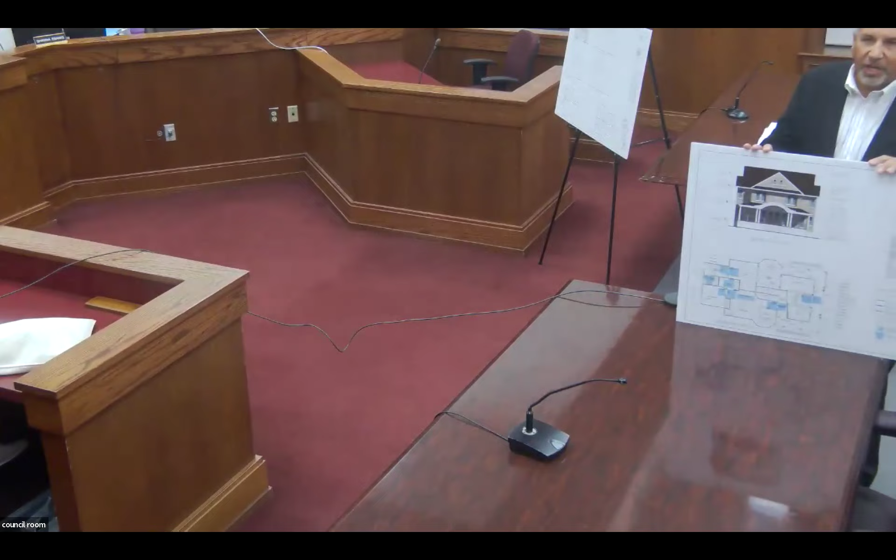We really wanted to keep the residential vernacular together, and keep that design intent absolutely the same. We didn't want to do a stark commercial storefront. Fortunately, where we are right now, we're the only residential looking structure on that strip. But we are sensitive to the fact that this was residential, and we want to keep that vernacular intact, and if you can tell from our rendering, that's exactly what we achieved.

So that's really what we're looking for, and we do want to enhance it a little bit. Karen, did you want to get away from the two entrances like we did, a single entrance, residential if you will, instead of two outside entrances. And we did want to put a nice divider.

I'm trying to understand the front door. Is it two double doors and then there's windows on either side of that? That's exactly what it is. It's two doors in the front, and it will have side lights on either side. That's exactly, yeah, it looks really nice.

And I do think it does keep the character and the charm of the original style that was on Monmouth Street, which was that kind of Victorian Rivertown look with the front porch, and it looks really nice. Appreciate it. So I have just a comment.

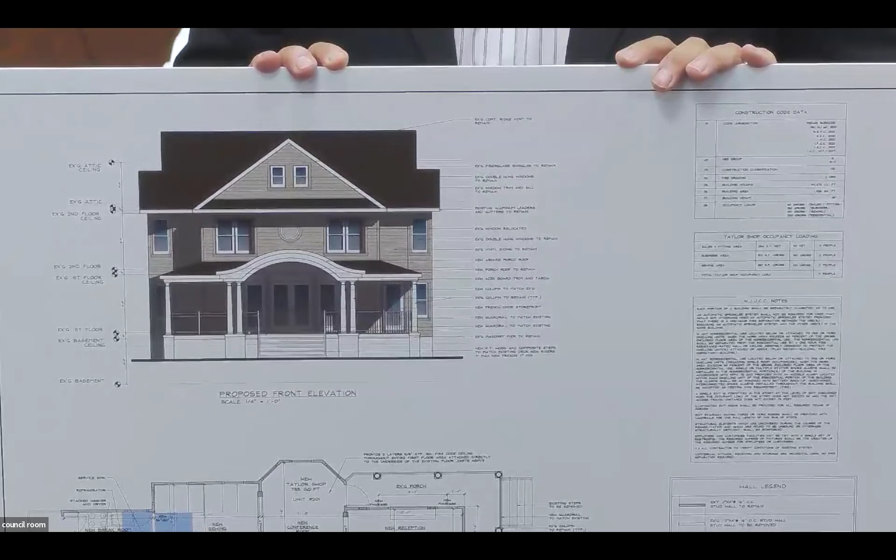What I will tell you is this detail is something we see more in historic homes, though we'll see it in modern too. It's a detail with a lot of historical reference. From what I saw of the paper on the architecture guidelines, that's what your architect is proposing: bring more detailing to areas. Quite honestly, we could just frame it straight the way it is, which would be a lot less difficult and more economical. But we want to bring back that historic character as much as possible with the little amount of work we're actually touching. So that's our intent, and I respect everything you've indicated, but from our standpoint, this is definitely bringing back more historical reference than what we had.

That's okay. Press the button, Karen. Press the button. I'm pressing.

I'm looking online and I found eyebrow roofs. It says it's late 19th, early 20th century, shingle, Queen Anne, Tudor revival, oftentimes dormers. If you drive down 520, I believe, on the right-hand side just as you get out of town, there is a building with that shape of dormer, and there are several in Manasquan as well, from the same time period. So roof versus dormer is the only consideration, but I think you can find some historic reference for this.

Since we're talking about that entrance again, the recommendation I would also make is, if you look at the doors around town, a lot of them have an arch over the door. So something to consider would be an arch over the door, maybe with a transom that mirrors the arch above it to make it more cohesive. Just a suggestion. Commissioner, that's a great suggestion, but unfortunately we don't have the ceiling height.

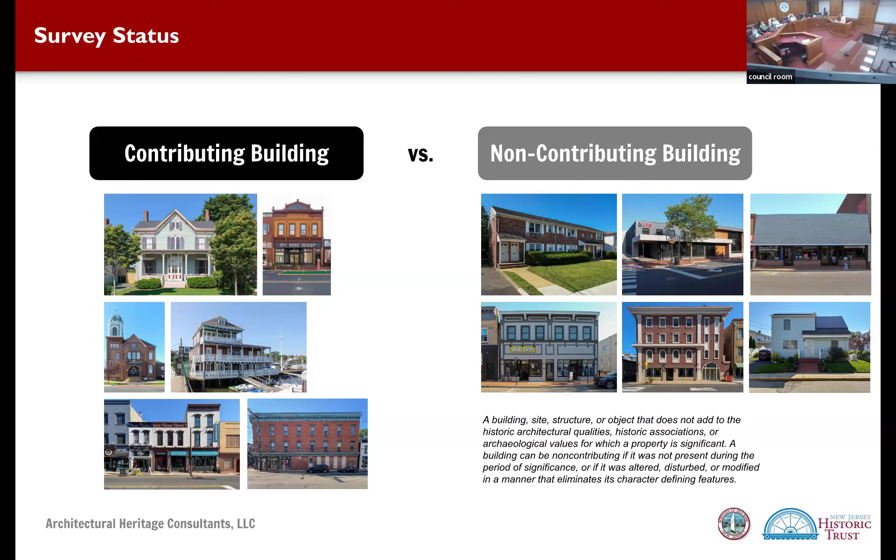The audience for the design guidelines is important to remember as we go into this first draft. There's three different groups. There's the applicant and public that have one set of questions and needs from the design guidelines. There's their architects or other design professionals that are a little more technically minded. And lastly, there's yourselves, the commission and staff, who are meant to administer the design guidelines and decisions in an objective manner in coming years.

Before we get to the draft, I just want to key everyone in on the next steps, just to measure everyone's commentary and understand what comes next. In September, I'm planning on having a final draft done, and I'll be presenting that to you all again ahead of time to look at. Then in October, that'll move forward to the planning board and up the chain to the mayor and council for adoption. The exact sequence will get worked out, but that's roughly how things are looking. And in November is when we're looking to do a public outreach event, which Marjorie has helped schedule already at the library.

We'll be publicizing that to make sure we get a lot of people there. The library is going to put this on their website. It establishes the time period in the meeting room, and it mentions: join us for this November meeting, Q&A and design guidelines for property owners. We'll also do direct outreach to the different real estate brokerages in town and architects, to make sure we get as many of them, if not there in person, certainly watching either live on Zoom, which I'll set up, or the recording.

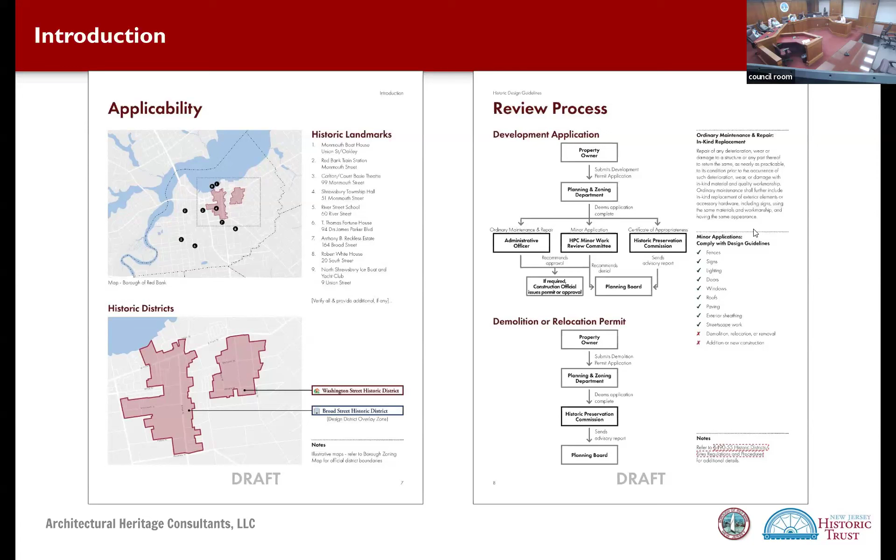The review process has gone through a few rounds with Michelle. She's been very helpful in untangling the way that Red Bank interprets and has set up your HPC, so this may evolve slightly as well. It's on page 8, and you'll see what minor applications are, so people understand that as your ordinance is written, if you comply with the design guidelines you can get your project approved pretty quickly, which is good. Then in the bottom right, there's a hyperlink to your ordinance itself.

Moving on to pages 10 and 11 — the preservation philosophy is just meant to be a quick crash course for people as to why history is important to Red Bank's current success as a town, how the HPC approaches materials, how the HPC acknowledges that many buildings in town have been altered over time, and some alterations are more significant and successful than others, and the importance of authenticity.

Page 11 is an important one that you should really be looking at during every meeting — the Secretary of the Interior standards, specifically for rehabilitation. There are 10 standards for preservation, restoration, and reconstruction, but what you're dealing with most of the time, like even the application you just saw 15 minutes ago, is a rehabilitation project.

I'm not going to spend too much time on the historic context section because that's gotten a lot of attention from the committee. Anything factually incorrect, missing, or overstated in this section, by all means let me know. But the history runs from pages 13 to page 19, and that's meant to be more of an architectural history of Red Bank.

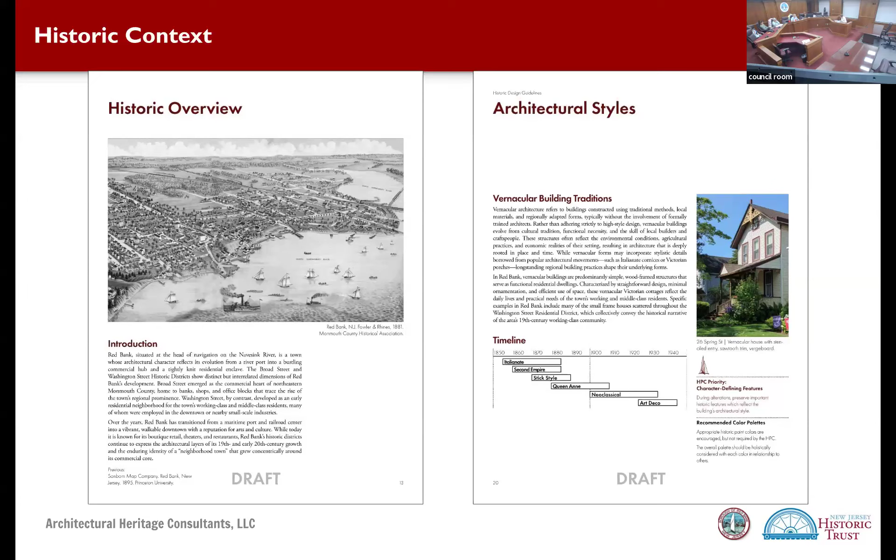And there's examples, one to two examples of each style adjacent to it, and I'll go through and edit the addresses like Marjorie just said.

If it's a gray border, that's a non-contributing building. And when you're reading stuff within the red box, those are the do-not-do's in the historic district. Along the right third of the pages, there are occasionally excerpts from the Secretary of the Interior standards - you'll see the National Park Service plaque for that.

Priorities of the HPC, really important stuff you want people to come to meetings understanding so you're not repeating it every month, are denoted by an icon, like your town logo has.

And then lastly, if you see the hyperlink symbol, those are going to be hyperlinks to hundreds and hundreds of pages of very detailed guidance that the National Park Service has put out over the last 40 or 50 years.

There is on this page, page 25, a discussion related to substitute and composite and imitative materials, which is always a hot topic and even came up during that application just now.

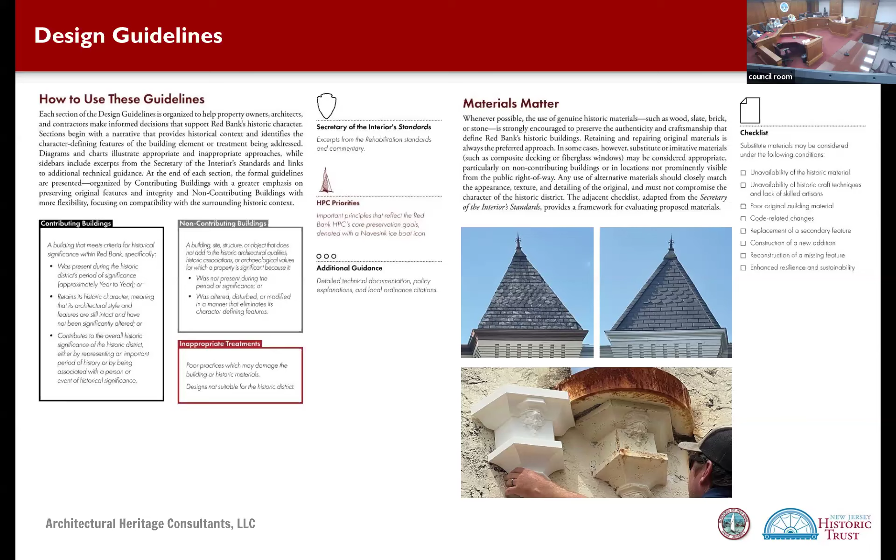Okay, thank you. I'm gonna move on to the roof section.

Just to flag a few things here. You'll see that on the first page of the section, this applies to both your Broad Street Historic District and the Washington Street Historic District. This is an excerpt right out of the Secretary of the Interior narrative related to roofs.

There's a description here about roofs generally, historically in Red Bank, within the two districts. And then on page 27, again, a lot of design guidelines have to do with materials. There's a chart related to replacement of primary roofs on contributing buildings. This is essentially encouraging people that still have slate, wood, or metal roofs to just replace them in kind. It's not appropriate to take a slate roof and replace it with an asphalt shingle roof.

It's unlikely that an entire slate roof would ever have to be replaced. It's typically just the underlayment. You can take the shingles off to deal with that.

And then the fourth row here is probably the vast majority of buildings in Red Bank, which are asphalt or non-historic roofing material. And that's providing flexibility for people to, of course, replace that in kind. You can always take your asphalt shingles off and put new asphalt shingles on. However, if you'd like to look at a wood or a slate roof, which some people may, that should just be based on historical documentation, so that we shouldn't be putting wood or cedar shake roofs on houses that once had standing seam metal roofs, for example.

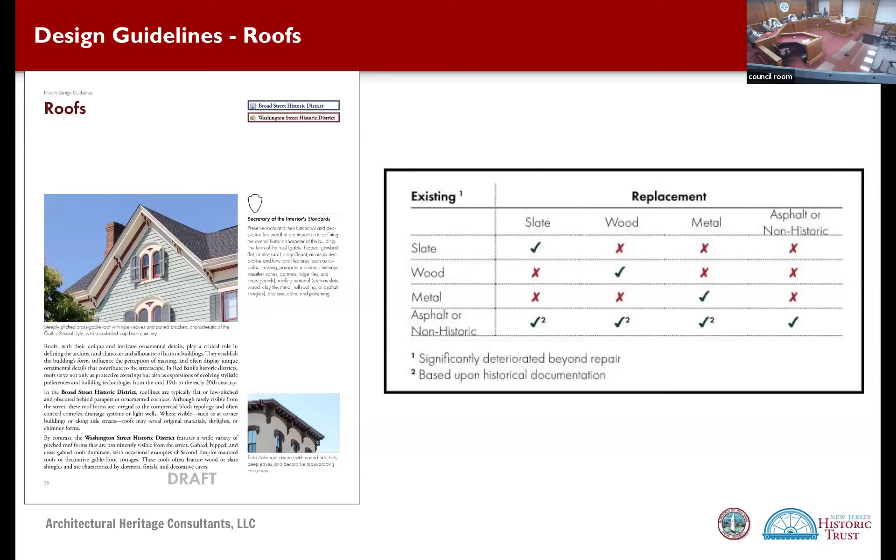Then at the end of the roof section, after you get through cornices, dormers, ornamental features, gutters, chimneys, you come to the design guidelines. They're numbered. There's 9 for contributing buildings, 2 for non-contributing buildings, and then 2 inappropriate treatments listed with also some pictures adjacent to all this. The guidelines generally follow a similar form.

The first one is going to be big picture, preserving that architectural feature. The second guideline deals with what in-kind repair would mean, in this case for a roof, when replacement is necessary, because the HPC should always be looking to, if historic fabric or material exists, to really preserve and maintain that.

Guideline 4 here is about appropriate primary roof material, so that was the chart we just looked at. Guideline 5 is secondary roof materials, which is typically just going to be asphalt shingle. Then there's guidelines on chimneys, gutters, equipment, and skylights.

And then the non-contributing ones, again, are essentially just trying to avoid creating an eyesore when it comes to roofs. Any questions on roofs before I move on?

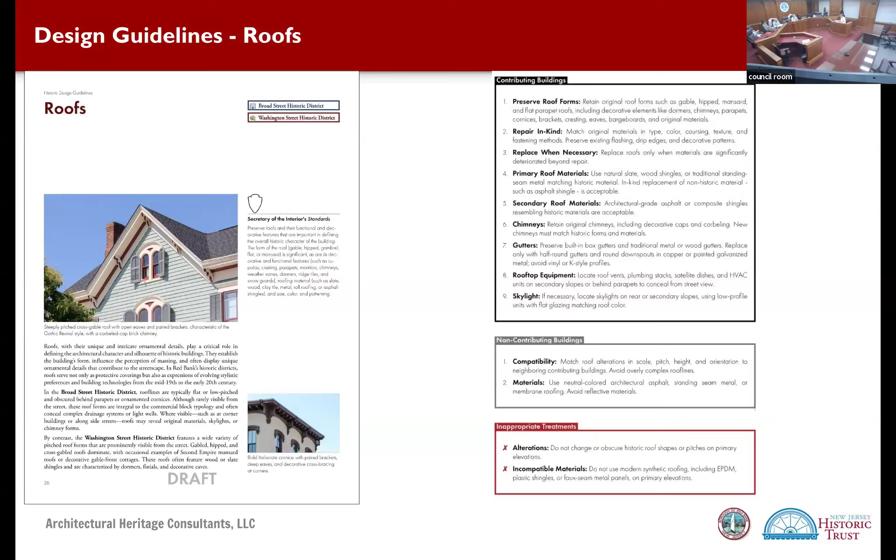Exterior cladding, so we're moving down the building. Also applies to both historic districts. There's guidance on masonry, wood siding, shingles in here. There's a chart again about materials, and this is a common one.

If you have existing vinyl, what's appropriate? That's the type of thing where anything is better than vinyl for so many reasons. That's a great place to look at HardiePlank. That's consistent with the Secretary of the Interior standards for sure.

We left that yellow because we wanted to hear the commission's thoughts on permitting the in-kind replacement of vinyl for vinyl. There are, I think, a minority of towns in New Jersey that I've dealt with that would allow that type of thing to happen. A lot of HPCs have taken this stance that we're getting rid of vinyl. It's not historic. It's not why people designated this district historic. And it just really should not be added in the future.

Thoughts on that? I hate vinyl.

I agree. I mean, we're setting standards here. I think in the standards, we should make clear that vinyl is not appropriate. And obviously, case by case, if there are compelling reasons to make an exception, we could do that. But I don't think we start with a low bar here.

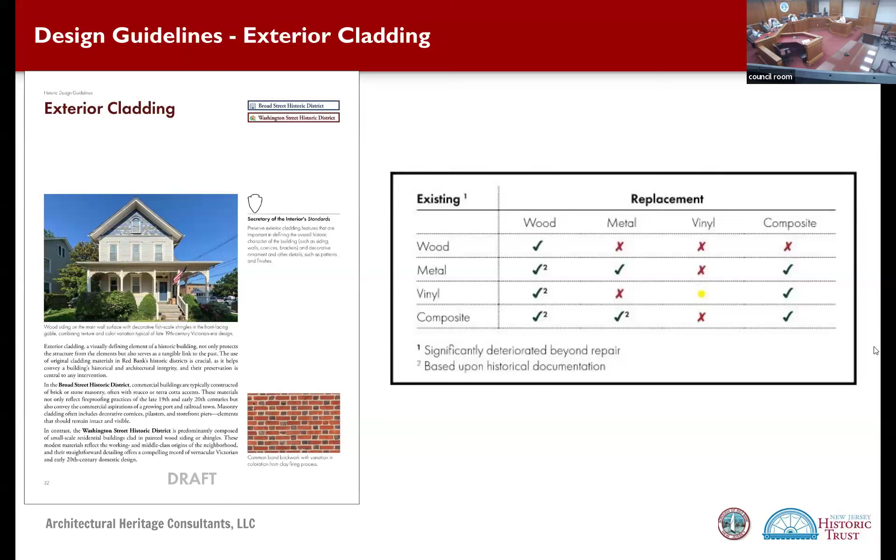The guidelines for exterior cladding, I'm just going to see if there's any I should highlight for you all.

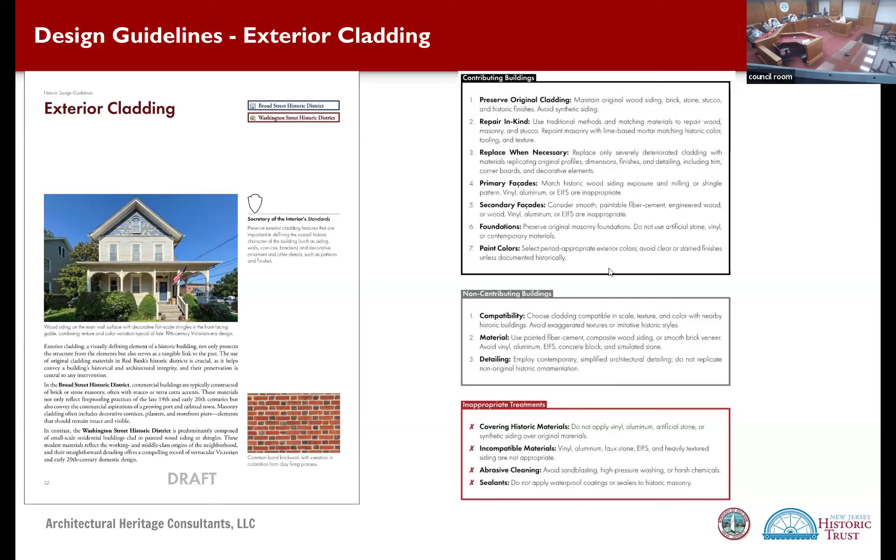EIFS refers to exterior insulation and finish system. It became popular in the late 70s and 80s. It's what stucco and similar wall finishes would be made out of, a cementitious material. It tends to leak, and it's gotten a little better recently, but it's really not a historic material. There's not a tremendous amount of it in Red Bank, there's certainly more vinyl. It's not a historic material, it's like a cheap stucco, and it's not a good replacement for real stucco.

Okay, moving on to windows. We're on page 38 of the guidelines. This applies to both districts again. There are diagrams related to just how to talk about windows, because there are dozens and dozens of terms you can use, and it's important for everybody to understand them.

Different types, 1/1, 3/1, Palladian windows are diagrammed on page 39. There's a diagram on the bottom right of page 39 about simulated versus true divided lights. Most of the time, I think you're going to see people proposing simulated divided lights, not true divided lights. At a minimum, they should be putting something on the exterior of the glass. It should not be muntins between the glass or muntins on the inside of the glass. You want to get some profile and depth on the exterior of the glass. So that's why that diagram is important.

On page 40 is another chart about existing primary window material on a contributing building versus what's appropriate. I think the same conversation and thought probably applies here related to vinyl windows and replacement with either vinyl or essentially financially equivalent composite like a fiberglass or Fibrex. There are so many different names for it. I think it would be great to not add any more vinyl windows to contributing buildings in Red Bank. So that's what this chart will say.

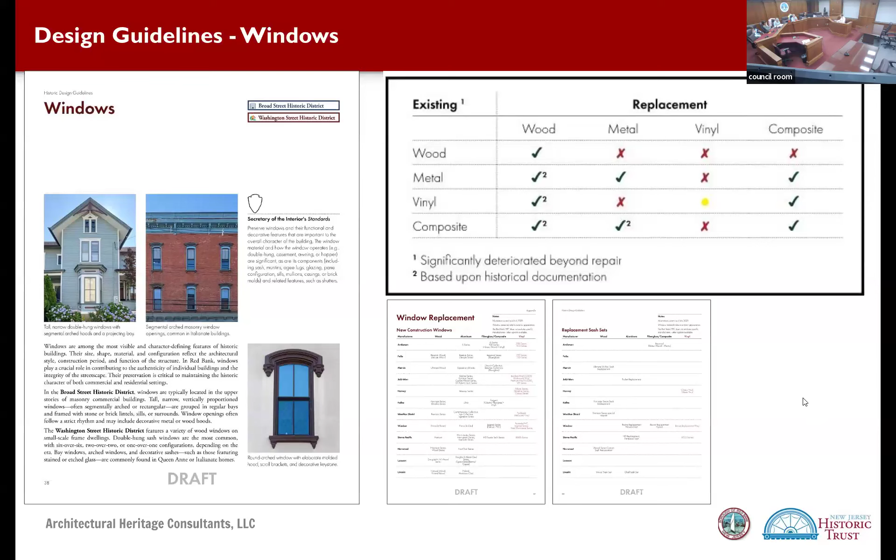But window related question: as you know, there's been a trend in recent years, especially with new construction, for black windows or bronze windows. And we have had people with historic homes or historic structures come in and ask, to the extent they need to replace the existing windows in historic homes, if they can change the color to bronze or black, as long as the new window in all other respects is architecturally, texture-wise, and in number of lights, et cetera, consistent with what the original window was.

What should our view be on that? I have to think about that one, and go back through pictures of the district, because there are quite a few examples of darker windows. It's a color thing. I have to think about that one. I'll have that sorted out by the September draft. It's come up several times.

There's a house we just approved the work on, and after the fact, when they were originally going to repair the windows, they started getting into it and realized they were not repairable cost effectively. So they asked, and said, okay, these are the colors we intend to use, and in that conversation they mentioned bronze. I have to think about that. My initial thought is that it's not appropriate, but we have to come up with a little more substance to describe why that's not appropriate, and why it's hard to see the muntin pattern, because it blends in with the glass and everything else that happens.

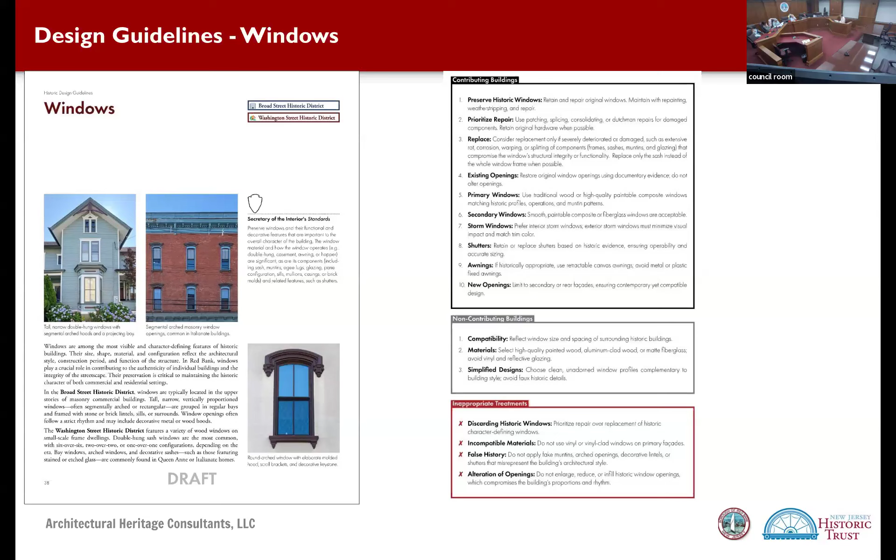Yeah, okay, let me think about that. I'll put that in.

Any other questions on windows, by the way, before I move on, or comments?

I just want to say, on the window guidelines on page 42, I agree with the inappropriate examples. We may get pushback because people don't want to put in central air and take the window units hanging on the front of the buildings, but I think we should still say it's inappropriate. I don't know if anybody cares, but the fact that you could have that hanging on the front of it. I think it gets back to us setting standards here. Obviously everything will be case by case, but we set an appropriate bar. I agree with the examples of inappropriate on the guidelines page for windows.

So porches and entrances is only for the Washington Street Historic District. The diagram of the different components of a porch, those 7 things, are what you should be seeing with every porch application. Railings and lattice work, which I think was even referenced on the application tonight, there's a diagram on page 45 about that.

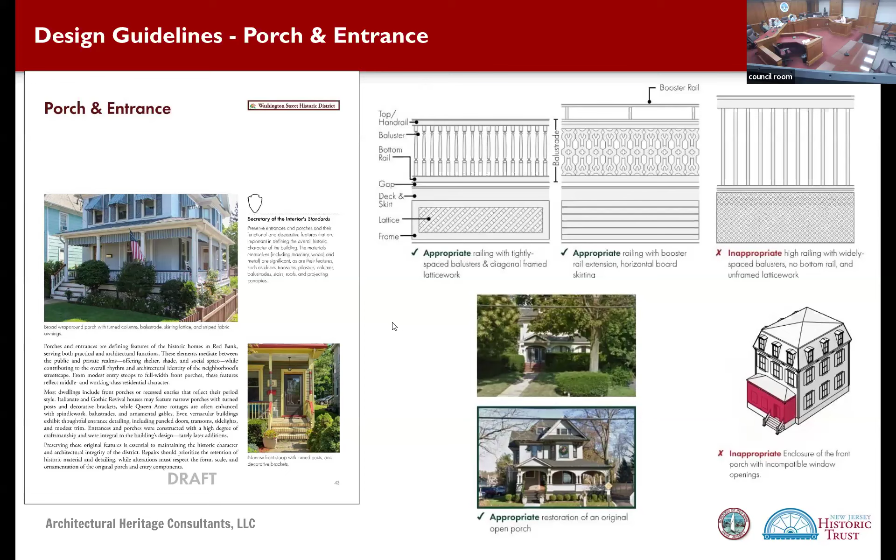And the guidelines for porches we will see on page 47, and I think they're pretty comprehensive. Next, component of porches, doors, again only for the Washington Street Historic District. There are a lot of very well preserved, particularly double doors, throughout the Washington Street Historic District. That's something I think has been done really well here in Red Bank, and that should continue.

Garage doors is tucked into this section as well, that's on page 50. And then on 51 is where you'll see the guidelines for doors. It's essentially about if you have a wood door, especially if it's covered by a porch, it's probably in good enough shape to be repaired, and should be. No one should be going to Lowe's or Home Depot to buy a vinyl or fiberglass door with that funny gold patterning on the glass, like the two bad examples on 51 are. That really degrades the historic district and streetscape.

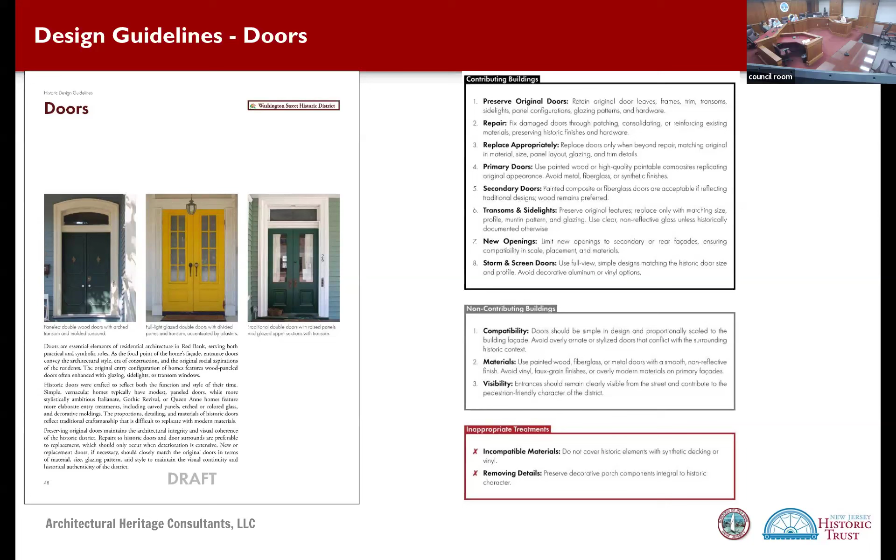Okay, page 52 is storefronts. This is an important one for Broad Street. And I'm going to, at this time, actually pass around these brochures I made to summarize this section, which I'm going to present at the River Center next week.

Thank you, I got one. You got one? Yeah, or Karen left. Oh, she left. You could take it, you could. Unless you want it.

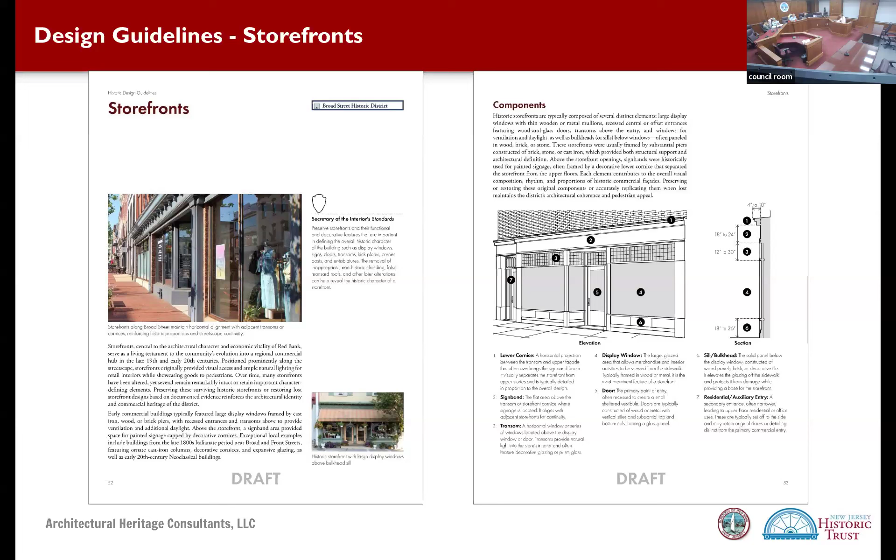Everything in the brochures is already in the design, it's just simplified in the brochure. So the storefront section has a diagram of a prototypical historic storefront and the 7 components of that. Then on page 55 is a flow chart to understand what type of treatment you should be doing for a storefront. This is something that, just from firsthand experience serving on the Hoboken HPC and advising the Montclair HPC, I see a lot of people get tripped up on, commissioners and applicants, even architects, as to what they're doing and what treatment they're supposed to be following.

So this flow chart on 55 is meant to demystify that, and the brochure is all built around this. You'll see if you open the brochure there are 3 different columns: restoration, rehabilitation, and new construction. Restoration and rehabilitation, unfortunately, people use interchangeably. They mean different things, going back to the Secretary of the Interior standards. There's separate and distinct philosophies for both of those.

A restoration project is for a contributing building where there's historic documentation available, and the objective of a restoration project is to return that storefront to how it once existed in an earlier time within the historic district's period of significance. So let's just say 1920 - we're here in 2025, you're returning that storefront to how it existed in 1920. In order to do that, there should be an intact historic storefront and photos of the historic storefront, so you're doing a faithful restoration. This is not an appropriate treatment for newer buildings, stuff built after the historic district's period of significance, and not where you're looking to change the historic look. So the brochure shows a before restoration example with some semblance of architectural fabric remaining, and the lower picture is what a successful restoration would look like after.

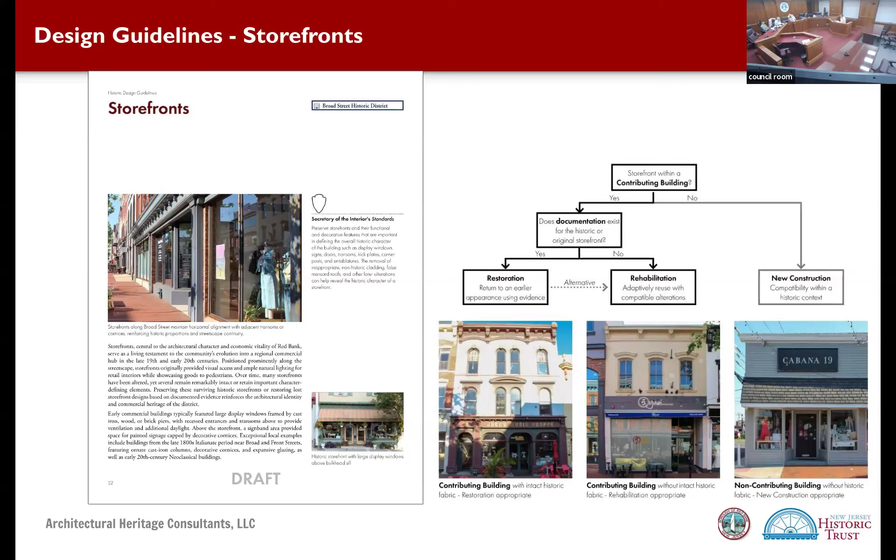Thank you, I have a question about this handout. I see on the bottom that it's New Jersey Historic Trust because it's part of the money that they gave us to do this. I'm guessing that when we have our next meeting of the subcommittee next Friday, you're going to share this with Maren. So this would be something that would be in the River Center, like in a kiosk or something. So we're going to pay for this to be given to the River Center and maybe a way for them to reprint it when they run out?

Yeah, I think it would ideally end up on the HPC's website, just the 2 pages that compose this brochure. Anyone could print it, and I would imagine the River Center would be pretty motivated.

Okay, so to get started with this whole process and introducing the guidelines, as part of your contract, would we get like 100 of these, or how would that work, to get this out there?

Some towns ask for these brochures and build them in. I don't think I have that for Red Bank, and I really made this because I sensed the River Center was maybe not understanding the different lanes a storefront could fall into, and I wanted to make it abundantly clear. I think this would be helpful for them. I like that it repeats the link.

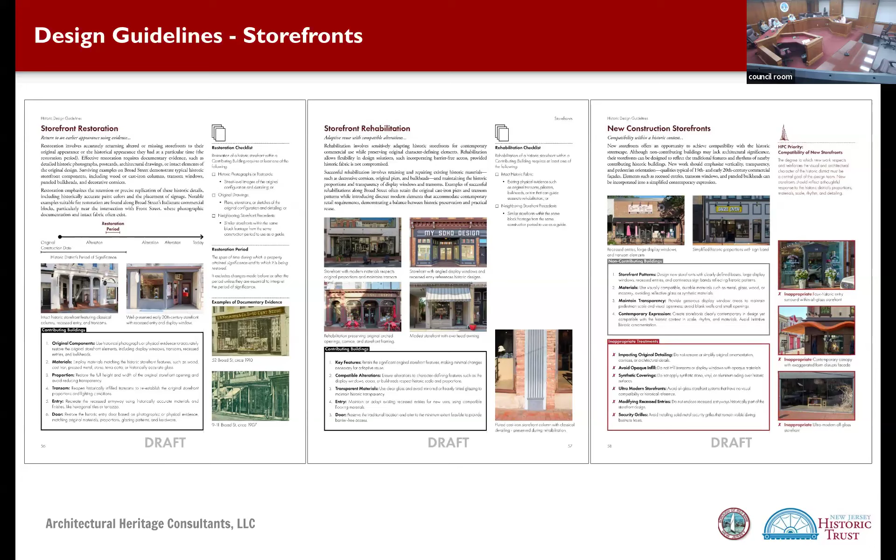Pages 56 to 58, which are spread on the screen, detail the different treatments per storefront. The majority of stuff you'll see is the rehabilitation one, but there are cases where people are restoring or dealing with a very intact historic storefront, and that's a different situation. Then there are other cases where it's not a historic building and people can do something a little different - not as different as the inappropriate examples I have there - but they have a little more leeway, and we're just looking for general references and compatibility in those proposals.

Also, in this section and in the brochure is a section on signage. First is identifying what type of sign we're proposing. There should be some dimension to the letters - it shouldn't just be a sheet of metal or plastic printed directly on, or vinyl wrapped. There should be some solidity to the sign in the historic district on any type of building. Heights are provided there - I'm still cross-checking this to make sure we're not running afoul of your zoning, because we don't want to create more confusion. There's also light temperatures in a diagram - people should most of the time trend toward the warmer end of color temperature versus the super cool blue light that isn't the most pleasant thing to see at night, especially in the historic district.

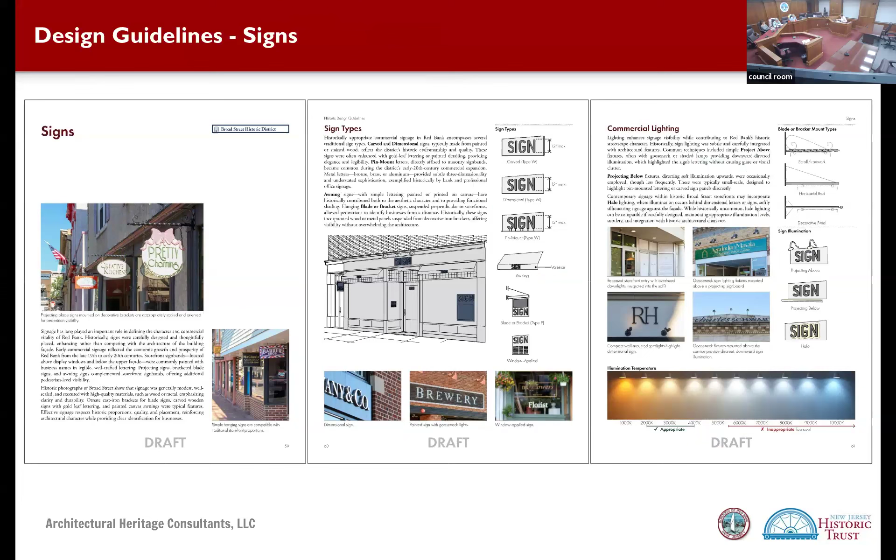Any questions on signs before I move on? By the way, that's a big chunk of Red Bank. Okay.

The following section is all site and streetscape. A lot of these are more in the category of recommendations versus guidelines, because you may not strictly speaking have purview over them. So this is stuff if a homeowner or business owner is curious, like an appropriate walkway between sidewalk and their porch - where to go for that type of stuff.

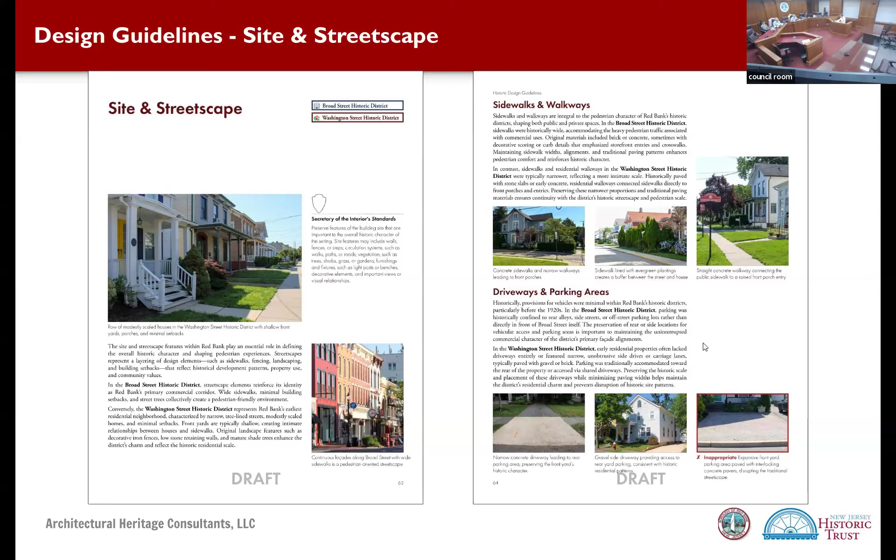Page 67 is the section on accessibility - about opening doors, adding lifts, ramps. There's a lot of storefronts in this town that have steps, so this is the section to look at for dealing with that sensitively.

Mechanical and utility equipment includes solar technology, solar panels, but given local ordinances that's a category of just recommendations and not guidelines. Ideally, they should not be on the front gable of a house facing Washington Street, but that's only a recommendation.

Page 71 is the demolition section. These are just the seven considerations from your ordinance pasted right there.

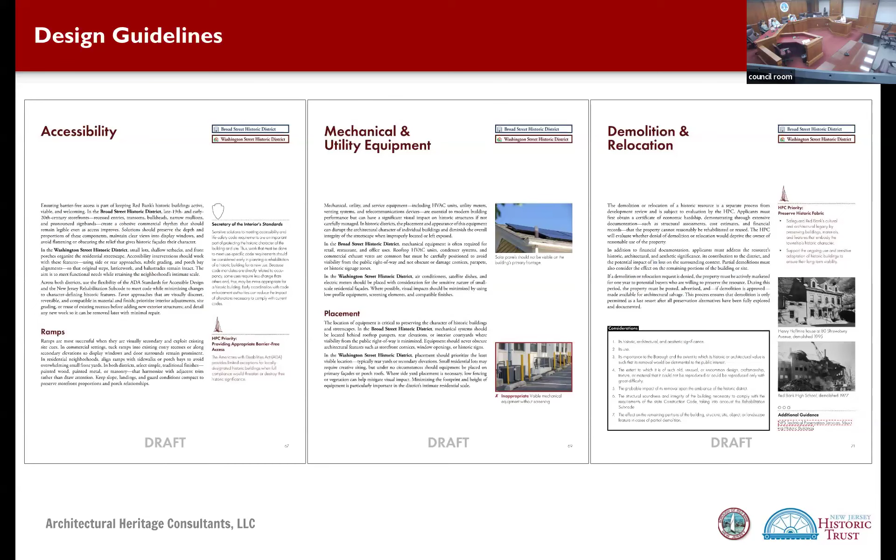And then we are on to the additions section, which starts on page 73. This is for both of the historic districts - you're applying Secretary of the Interior Standards number 9, especially, and also 10. The additions section includes a few pages just priming people on site placement basics - height, massing, proportion, scale, architectural features.

On page 76, you get into actual guidelines for three different broad categories of additions you may see: side and rear yard additions, so lateral expansions of a house; rooftop additions, on page 77; and carriage house and accessory structures on page 78. There are guidelines for each, depending on if it's an addition to a contributing or non-contributing building, along with a diagram of a very appropriate example of that type of addition and a very inappropriate, disruptive example that we would really like to not see in Red Bank.

Any questions on additions? No.

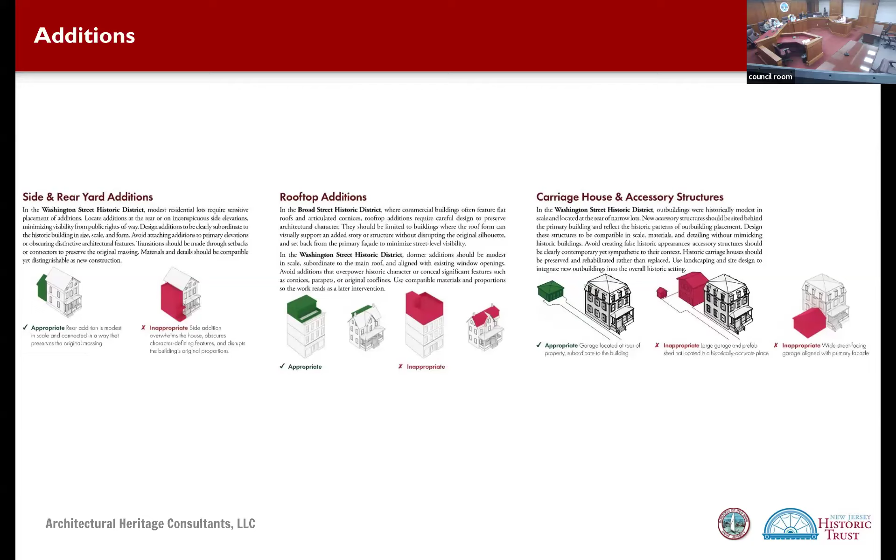The last section here is new construction, so this is for both districts again. And this is divided up into the different criteria that you can use to approach a new construction project.

I will renumber the guidelines here so they run continuously. So the guidelines for site placement start at 1, and when you get to height and massing, that should pick up at 8, not 1 again, so you can always cite what guideline you're looking at. So on page 81 you would start with 8, 9, 10, 11. You'll be able to say, I'm looking at new construction guideline 9, and there's only one example, because right now I have 3 or 4 different number ones, which could get confusing.

Site placement is a factor, height, mass and proportion and scale, architectural features, and lastly materials. The examples given in new construction are purposely only inappropriate examples. I think people should have some flexibility and design thought in new construction, so we didn't include appropriate examples, because we don't want that to become a copy and paste situation in the future. People should think about it and bring support.

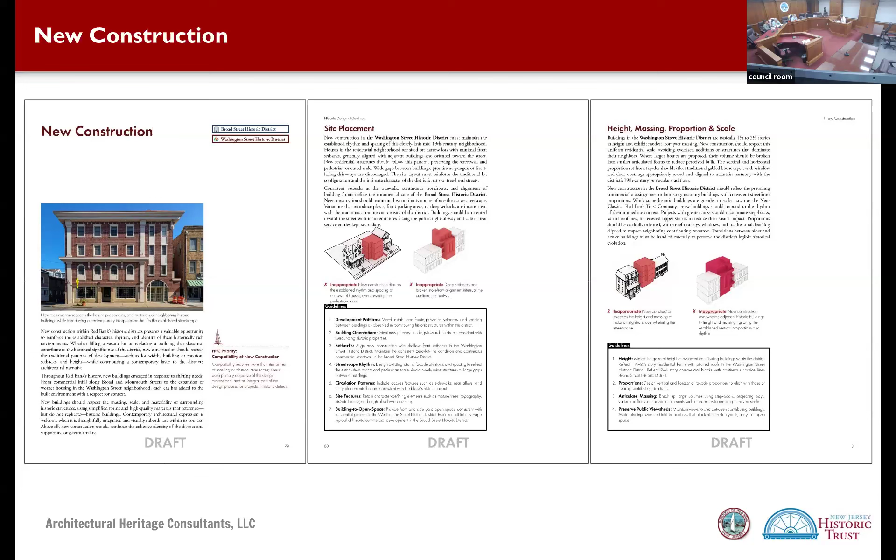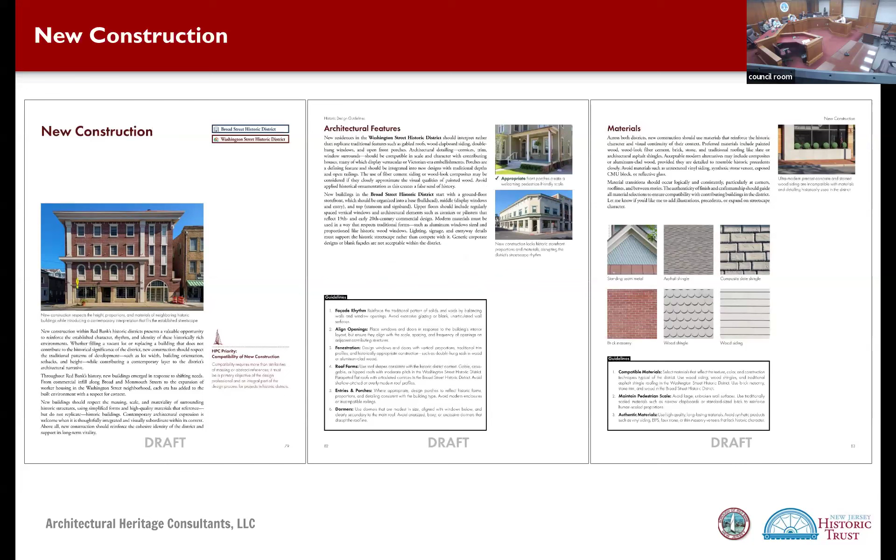Any questions on new construction? Couple examples in Red Bank in the districts. I tried to include the good and the middle ground for new construction there.

Moving on to the appendix, that starts on page 84. There's an enlargement of the Broad Street Historic District and also the Washington Street Historic District. I'm not sure if I'm going to keep this in the final, I'll talk to the committee about this, but if you see a lot number with a highlight on it, like a yellow circle around it somewhat faintly, that means that building has already been surveyed.

So that wouldn't be part of the second survey, no, you would not be resurveying those. I think we'll talk about at the next meeting, potentially surveying the balance of the contributing buildings within that historic district would probably make the most sense.

Yeah, so for example, we're just talking about on Monmouth Street, right? It looks like maybe it's the old town hall, right? A diner, townhouse, yep, a diner next to it. And then lot 15, which might have 2 structures on it, could be the old Elks Lodge, I don't know.

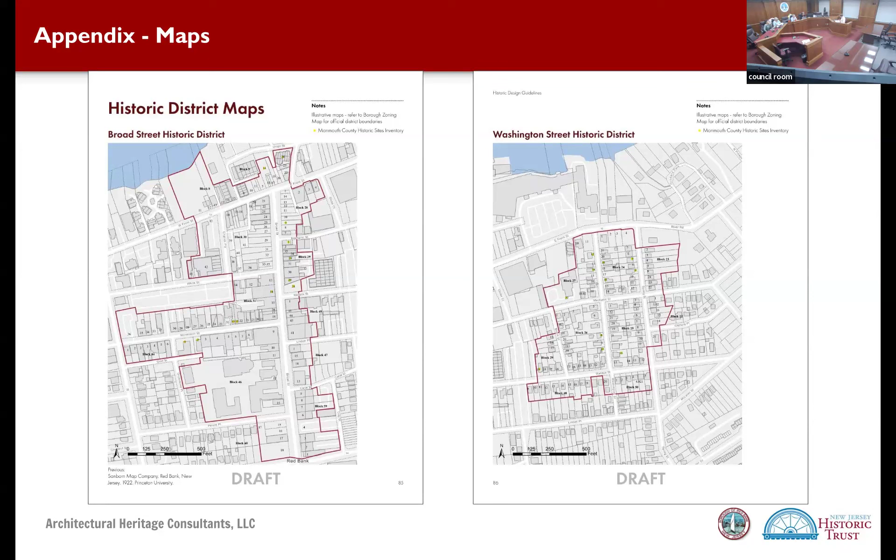Okay, the next two are window replacement. I'll verify if Pella has a replacement sash. I do think they should have something, it should not be blank.

And then the glossary is a few pages, pictures of as many examples as I could include there. And then the last page is a bunch of hyperlinked resources, federal, state, county, local, and books for people that feel like reading even more once they've gotten to this part of the design guidelines. There are a few good books there on paint colors for homeowners curious about appropriate Victorian paint.

And that rounds out the design guidelines. Pages for autographs.

So Marjorie, I think, has maybe a draft soft cover copy. If you just want to show everybody else, that's how the final would be bound, in a similar fashion to that. And that's what is printed and available directly from Amazon, 1 to 100 copies. That comes in, it got delivered to Marjorie in like 36 hours. Just to know.

Any general comments or questions on the guidelines, stuff for me to work on towards September? I just want to say that I've been very pleased with the process so far, and I look forward to using this as Christmas gifts.